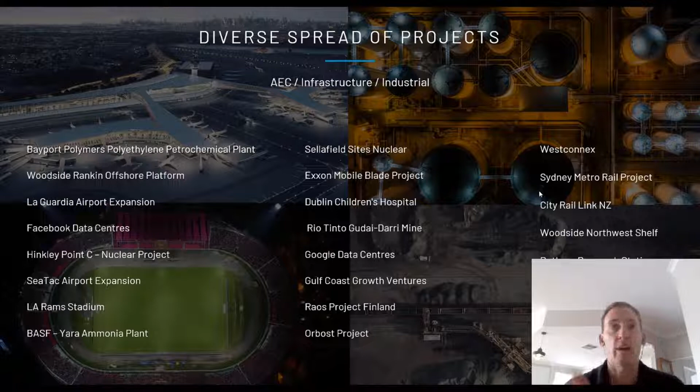And typically where there is a Navisworks model, where there is a 3D model involved in a project, whether that be from the design, the construction, or the asset management stage, iConstruct may typically be involved at some stage, purely because of the power of Navisworks, of course, but also iConstruct Pro.

So who is iConstruct, and really where do we sit when we talk about advanced work packaging and 3D models in general? iConstruct Pro is the original product from iConstruct, has been around for a number of years now, and really that's the foundational piece when we talk about model management within any project lifecycle.

So if there is a 3D model involved in a project and they're looking to standardize that model across all the different systems that they're ingesting and federating the models together from, then the foundational model conditioning tools from iConstruct Pro are really vital in setting up that model for success when we look at downstream processes like work packaging, AWP, work pack status reporting, constraint management reporting and all sorts of things. So iConstruct Pro is vital to that process.

The next being Control Panel, and Control Panel is really around visualization of constraint management, and then enabling the user through the use of Navisworks to create IWPs or any work pack for that matter — though we've spent a lot of time in the installation work pack space — based on the different data that we're ingesting and aggregating together from project controls, engineering, material, schedule, progress measurements, all sorts of things, to then make a more intuitive decision when it comes to creating IWPs, and then compiling the data associated to it.

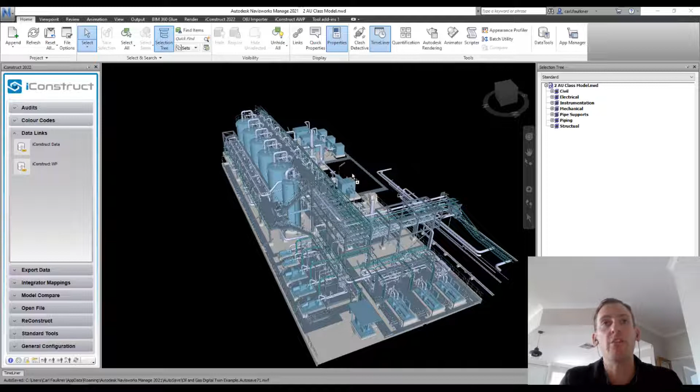So you can see here I've opened up a session of Navisworks Manage. What I might do quickly, I might just drop in the original model just to give you an understanding of where we can start from and then where we can end up. So this is an existing PDMS model, a typical federated site model, project model.

There are many different file types in here, RVM files, NWD files, DGN. There's some ReCap point cloud data in here as well. There's all sorts of stuff. And in reality, it's very hard to manage when you've got varying levels of structure and varying properties and all sorts of things, and file types as well, for example.

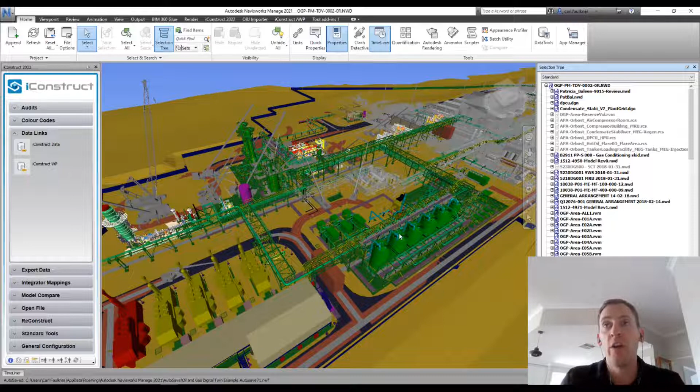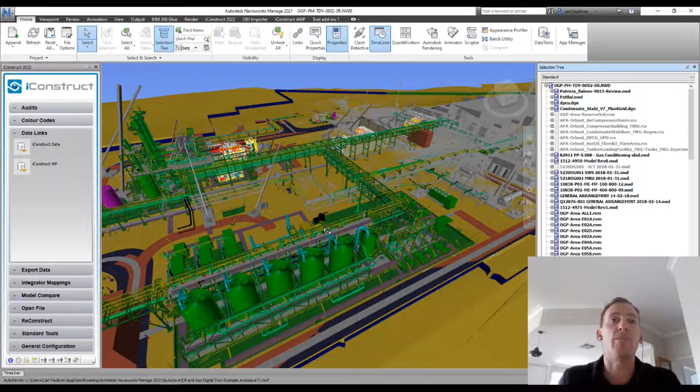So what we do in the first instance, typically when we look to manage models and geometry within the Navisworks space, especially using iConstruct, is to run the ReConstruct tool. And what that does is actually allow us to clean up that selection tree and standardize it. But not only that, it also allows us to then slice up areas and break large NWD files up, and change colors, and do all sorts of things. So it really allows us to condition that model for all that downstream processing.

So what I might do, I've already run the ReConstruct tool. So now I'll drop the new NWD file in, the reconstructed NWD file, and you can see now the selection tree is nice and clean and neat and tidy. It's not based on file type, there aren't separate RVM files in here. And you can see in this instance what we've done, we've grouped the model, or structured the model, based on discipline and then based on tag, for example.

So in this instance, you can see we can go to the CWA, that's the construction work area, the CWP, which is the discipline of course, and then the tags associated to that. And you can see the mechanical and the piping aspect as well.

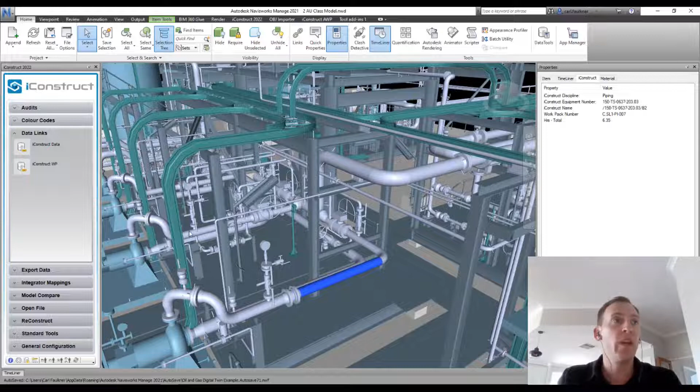From there, what we can do is look at how we can actually add data to that object. So you can see when I select this object here, we have some metadata associated to it, the work pack number, the equipment number as well. And we can use the data link tool to, of course, add that on, and that's what I've already done.

So once we have appended and data-linked on the metadata, say for example the tag, the work pack number, any other properties we'd like to embed on the object within the model - and we don't have to, by the way. We can build a lot of those relationships now within Power BI, and we can actually decouple the properties and the metadata from the object, and then do a lot of that relationship building and associating properties back to the object within Power BI if need be as well.

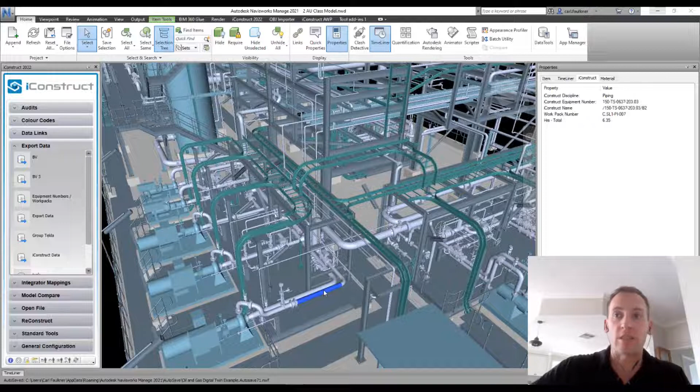So the next thing we need to do is export the tag, or the linking attribute, from the model and from the geometry out into a database or into a table. So we can use the export data tool to do that.

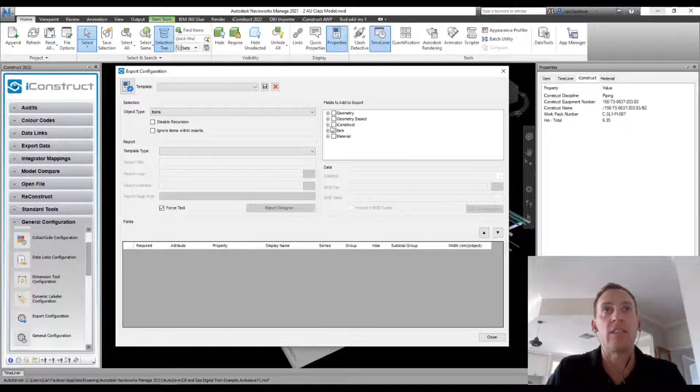So if I go to the general configuration under iConstruct Pro and go to export configuration, I can then refresh properties and build a new template or configuration. And in this instance, I'd like to export out the iConstruct name and the equipment number as well. I can export out any property - I might export out the work pack number also.

I'm going to export that into Excel. However, you can see we can export that straight into SQL, into Access, or into CSV. So there are many options when it comes to the file type in which we're looking to export out. And as I mentioned in this example, we'll export out the Excel spreadsheet.

I will actually look to group the data by iConstruct name in this instance. So I will select the group, and that will group all the objects that have the same iConstruct name, which is that component name there. It'll group all those objects together in the one line item within that table, so it'll reduce a lot of the duplicates as well. And then I'll hit save, and I'm going to call this iConstruct name to keep everything consistent.

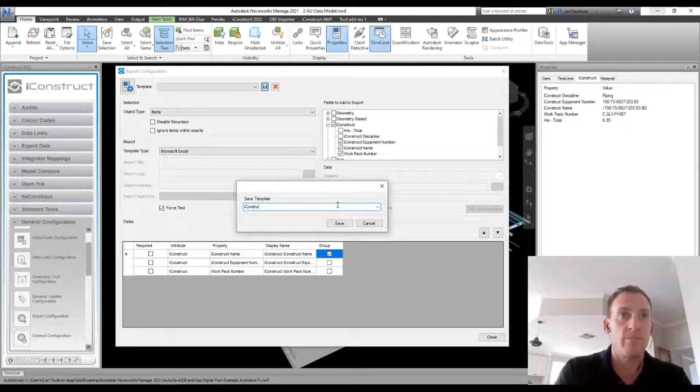Great, so once I've done that, I've saved that template. I can now close that, and I can now export that data out by selecting everything, of course. I can go to my export data, and I have my iConstruct name, and I can export that into an Excel spreadsheet or into a data table. And that really allows me to build the relationship or the link between the model and the data table or the report or the dashboard that we're looking to build within Power BI.

So once the data has exported out of Navisworks using iConstruct into Excel or a table, you can see what we've done here is we've exported out the iConstruct name, the equipment number, and the work pack number. Now, one thing that we do need to consider when bringing this data into Power BI is how we link this line or this object or this data table to the geometry. One thing we need to make sure we consider is naming and adding in the right structure of that property.

So one thing we've done in this instance, we've just adjusted that and added the colon in. That's the way iConstruct and Genus Connect identifies that column as being our linking attribute, and also the tab and then the property name. That's how it's structured when we look to build that connection within Power BI.

So let's save that now. You can see we've got the iConstruct name, the equipment number, and the work pack number, plus it's grouped the objects together. So we don't have duplicate objects, for example, and everything's unique, which is very important.

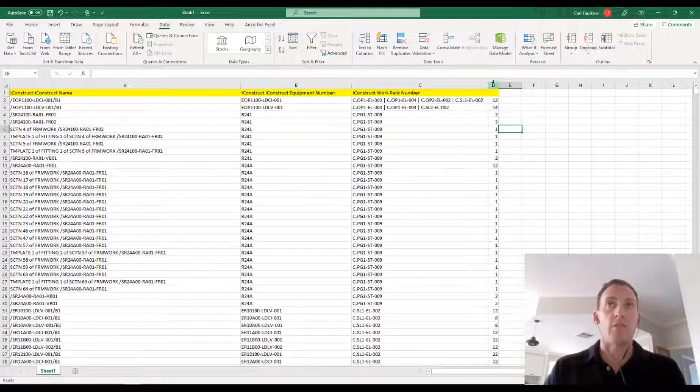However, there are many different ways and means of going about that. I'm just going to delete that out. So once we save that, I'll just save that in a moment.

So step one is exporting the data out of Navisworks. Step two is then actually uploading that model into Genus. So let's jump into Genus now. I'll just open up a new Chrome session and sign into Genus.

And so now what I'm doing is I'm launching Genus, and I'm going to go to my project. So this is Genus, the next product that I was talking about right at the start of the introduction. So the great thing about Genus, you can have multiple projects, multiple jobs in those projects as well, and then multiple models within that job. So there's a great way of managing the models.

You can have multiple levels. It's account-based as well, so I can add additional users, I can remove a user, I can only allow a user to be a viewer, for example, or an editor, or an admin. So there are many different ways you can invite multiple parties, whether that be a client, or an engineer, or a workplace planner, to actually view and access that data.

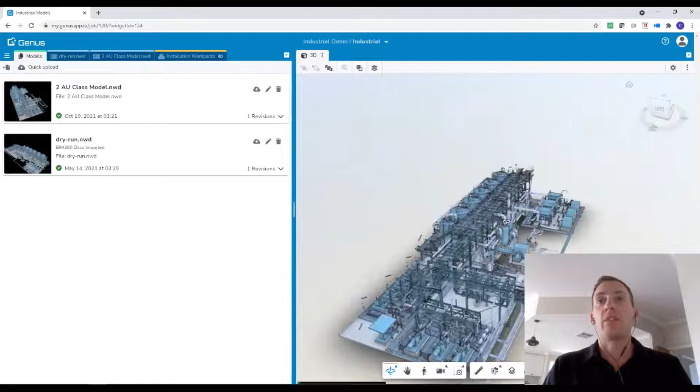So here I've got this industrial project, which is the project that we've been working on within Navisworks. And when I select the job, it then launches that job. And you can see now we've got the model, which is very important. So you can see here we've got the model, and look and feel, it's exactly the same as Navisworks. It's not different at all. So it's a great way of actually collaborating and pushing that model into the cloud.

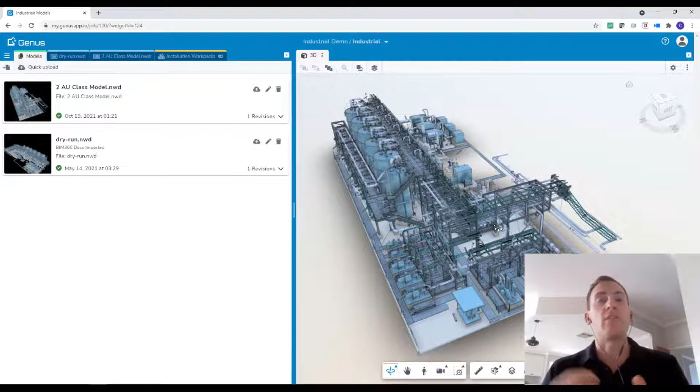And there's plenty of different use cases in which we could start to use Genus and understand how we can bring value through that. But today we're going to concentrate on the Power BI piece and pushing that back down to Power BI through the Genus Connect custom visual, and then obviously building out dashboards and tables from there.

So once we've pushed the model into Genus and it's processed and become available, the next thing we do is bring that back down into Power BI. So I open up Power BI. You can see I've actually built an existing dashboard or report. What we're going to do is build a new report, and then I'll come back to this one and talk through how a more complex dashboard is related, plus some other bits and pieces we consider.

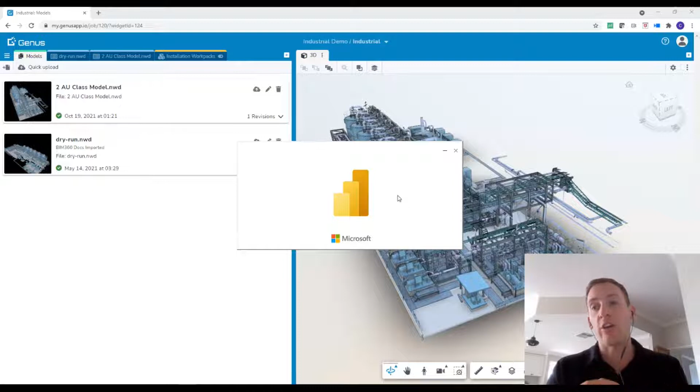I'm just going to minimize that and open up a new session of Power BI, and then we're going to start working through loading the custom visual, defining which model we want to view, creating an association and color coding, and going through some of the other features, functionality, and options we have when looking at Genus Connect within Power BI.

So I've loaded up a new session of Power BI now. The next thing I'm going to do is load in the Genus Connect custom visual. If I go to import, you can see here I've got a custom visual, Genus Connect for Power BI. I open, and now that loads in that custom visual file, which you can see here, and then I'm going to open that up. Now you'll see that it opens up a new, embedded session of Genus within Power BI.

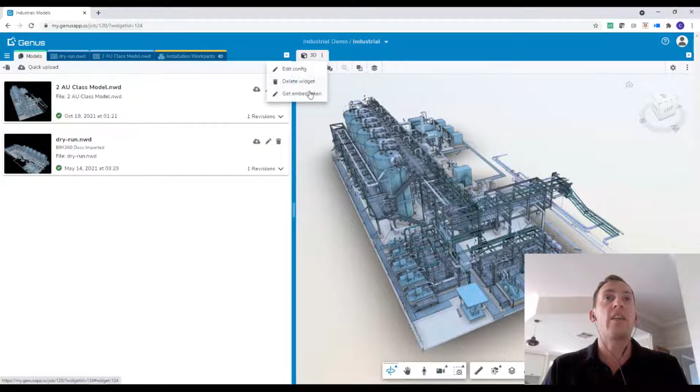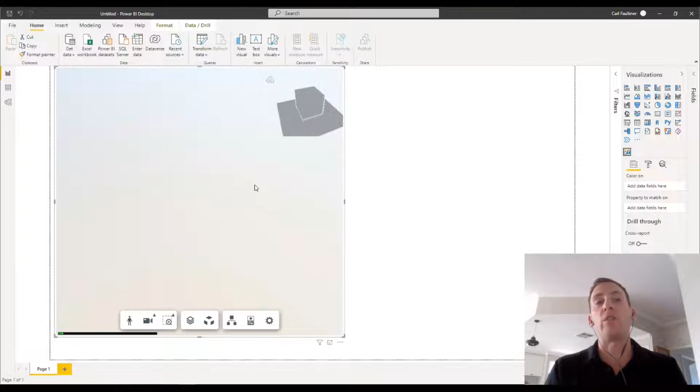It'll ask for a token. So what I need to do now is go back to Genus and grab that token. I'll get the token and copy that to clipboard, then jump back into Power BI and paste that in, and now that's saved. That acts as my credentials, using my login details based on that widget or code, and it also defines the model we're looking to display, or the widget we're looking to display within that custom visual.

So it's pretty quick. Now we've loaded the model, it'll just finish loading. You can see now we've got some of the features on the left-hand side from Genus, plus some of the Forge functionality you typically see within most Forge products. So, for example, properties, and there's a selection tree or a model browser.

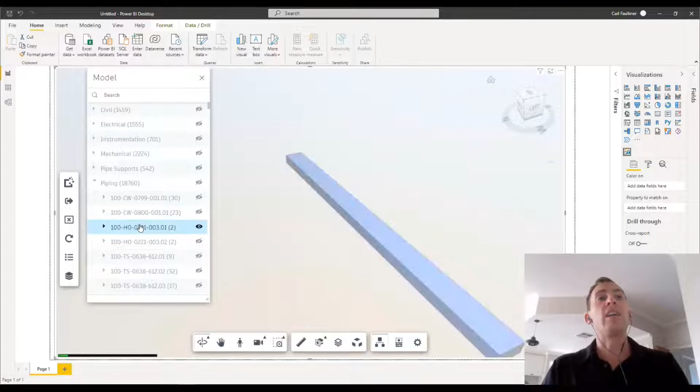Similar to Navisworks - if I just move this to full screen, and I know we'll build out a visualization in a second, but you can see now if I want to navigate to the piping, I can use the selection tree or model browser to navigate to different equipment tags or assets, whatever it might be, within that model browser. And this is all through Power BI.

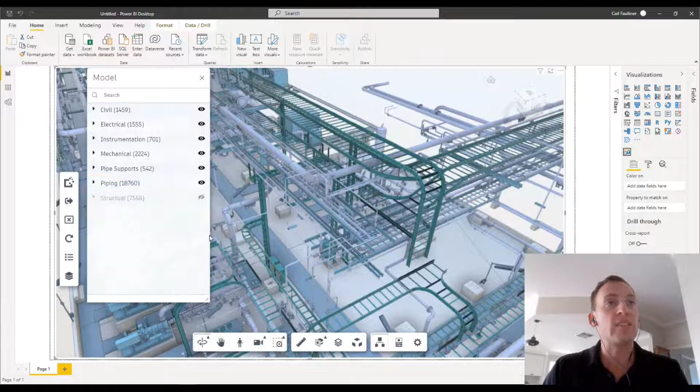So it's a very simple, easy to use interface, much easier than Navisworks, and still intuitive enough that people can go through and work out how to view, filter and do all sorts of things. Plus choose their own adventure when it comes to how they want to present some sort of outcome or objective, which is obviously the most important thing of BI.

So let's talk about how we connect data sets now to Power BI. The first thing we need to do is bring in the data table, and we're going to use the Excel workbook or get data option. It could be either, of course, but in this instance we use Excel workbook, and I'm going to load up the spreadsheet that I've created before.

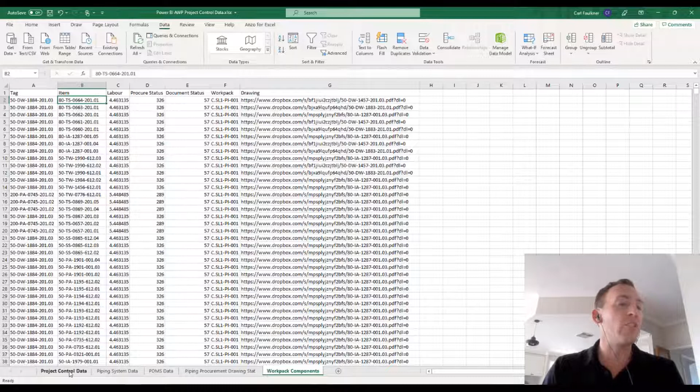So that's in here and in here - I've got one here, and I might just open this spreadsheet up a second. Now this is a little bit bigger than the one I built or exported out from Navisworks, and it just gives you an example of the varying data sets we can now introduce into that relationship, or build relationships between the different data sets, and then relate them back to the geometry within Genus Connect.

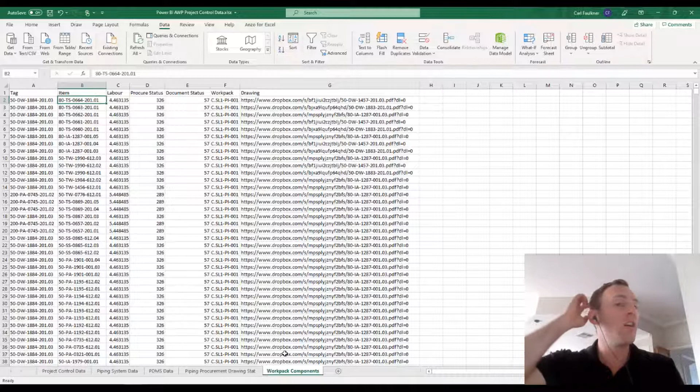For example, we have the project control data, which is vitally important, system data for commissioning, testing, all sorts of things, PDMS data - so the engineering and asset data that's created within the CAD system - and procurement data and work pack components, so more itemized material management data. So if we wanted to relate material management to procurement, to system data, to project control, right?

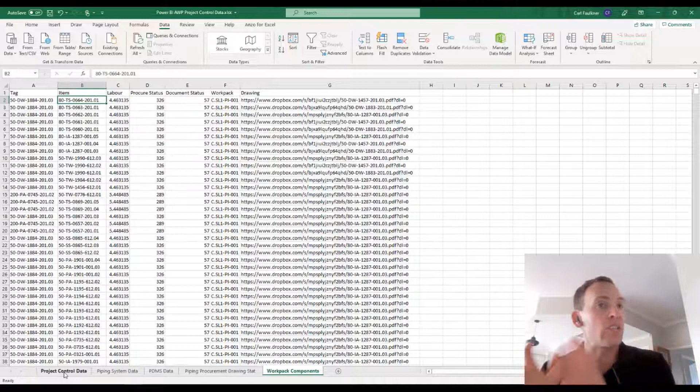So all these different disparate systems and data sets within that project delivery and AWP space, we now have the ability to connect them all together, utilizing the geometry as that central connector, which is vitally important. In the project control data, you can see we have the work pack number, the start date, the end date, and some variables, such as whether it requires scaffolding or a resource density calculation.

That's the great thing about introducing geometry into a lot of the decision making around space and location. Now we can calculate resource densities and scaffold requirements based on Z values of objects within the model. So if a Z value is greater than 3 or 5 meters, for example, it requires scaffold, tag counts, and all these are clashing as well.

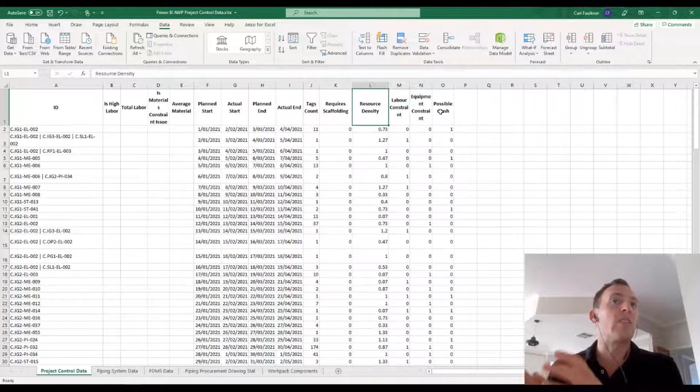If you're performing clashing activities within Navisworks and want to translate that across as a constraint, when we create our constraint management dashboards, that's another opportunity. So it's all about relating the geometry, and a lot of the decision making we do within the geometry, back with the data tables, project controls, and engineering data that we typically do within other database systems. It's a way of bringing that all together and connecting it.

So you can see I've got quite a lot of data here. Most important thing, as I mentioned before, is the iConstruct name. That's my linking attribute between these tables and, of course, the geometry. So let's go through how that works now.

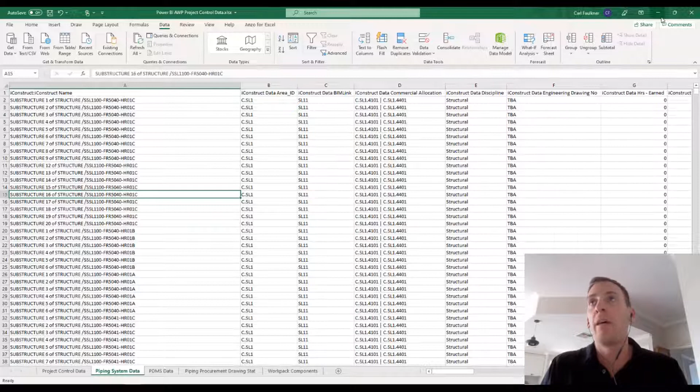As we all know within Power BI, it's not just Excel, but we can connect to SQL databases, Access. So I'm just going to bring in all these different tables now, and we'll start to build out different visualizations. I'll just quickly review them to make sure the headers are correct - that's also an important thing to consider. They all look pretty good to me, so I'm going to press load now, and that'll load all that data in.

Going back to what I was saying before, the great thing about BI is the fact that not only do we have to connect to Excel spreadsheets or CSV files, but we can also connect to an SQL database. There are other options as well, which are a bit more intuitive - SQL databases, web OData endpoints, for example. And if you go to more, there are other options in here as well, which I think are of real value.

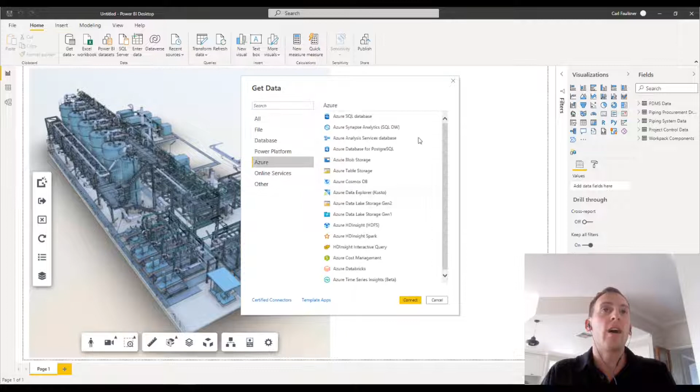So when we start to look at some of the other services that are available - Amazon, for example, PostgreSQL, SAP HANA, SAP, Oracle - there are just so many examples of how we can connect to different data, Azure as well, for example, if that's where we're running the data.

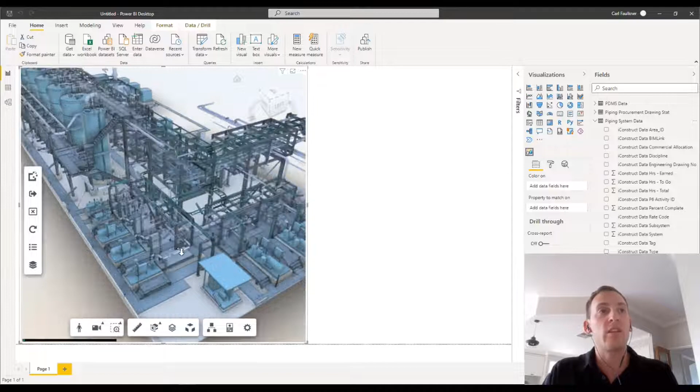Okay, so once we've done that, the next thing we want to do is quickly connect the data sets to the geometries. So from there, we want to go to our piping system data. In here, we have our linking attribute - in this instance, the iConstruct name. If I just quickly zoom onto an object and select the property browser, you'll see here, and I'll expand that, our iConstruct name - that's my linking attribute. So I'm going to drop that into the property to match the field in the visualization configuration.

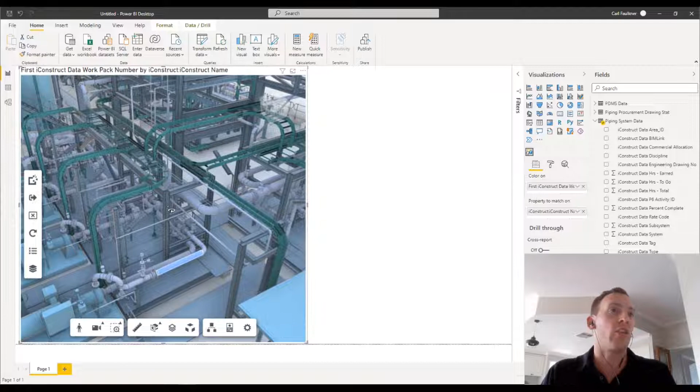And then I'm also going to use the work pack number as my color coding property as well. So now you can see I've color coded the geometry based on that work pack number. It's a quick, easy way of color coding the geometry from an external data set. And as I hover over, there's a tooltip, a typical Power BI tooltip, showing what the iConstruct name is and also the work pack number associated to it. So that's quick, easy, and simple to use.

And then we can start to bring in all sorts of different visualizations and get creative with how we build out dashboards and visualizations. So let's jump back into the original Power BI AWP constraint management dashboard and status report that I built previously, and start to talk through some of the use cases and ways we can relate this back to the AWP space and how it can provide value.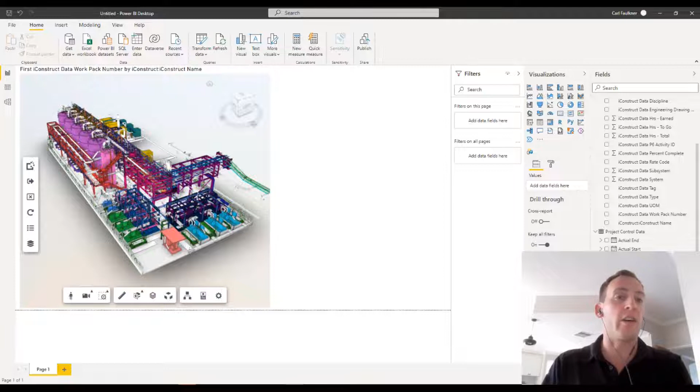So I'm just going to jump back into my previous dashboard here, and you can see some of the examples in which we've brought in. I've just color coded the piping, the piping work packs in this instance, but of course it could be any discipline. It doesn't need to be piping. It could be mechanical, structural, electrical if you've got equipment modeled, and concrete as well.

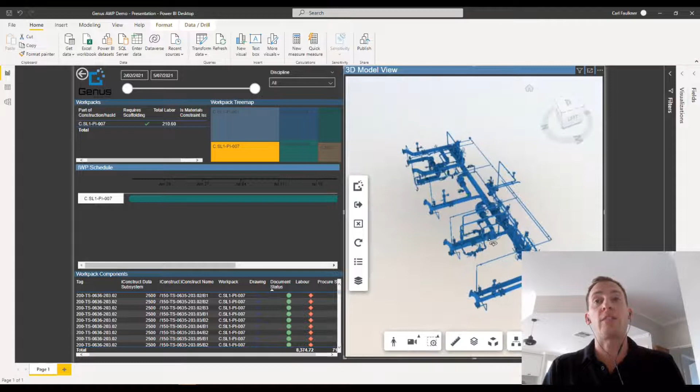One of the great things is just identifying what is within a work pack. So if I want to see what objects are within a work pack, for example piping work pack 07, I can select that, and that'll zoom to and show me the objects contained within that work pack. I can also go to my settings within Forge and ghost hidden objects, and you can see now it'll just ghost out the objects that aren't selected, and then I can go back and select that, and that will remove and hide all the objects that haven't been selected.

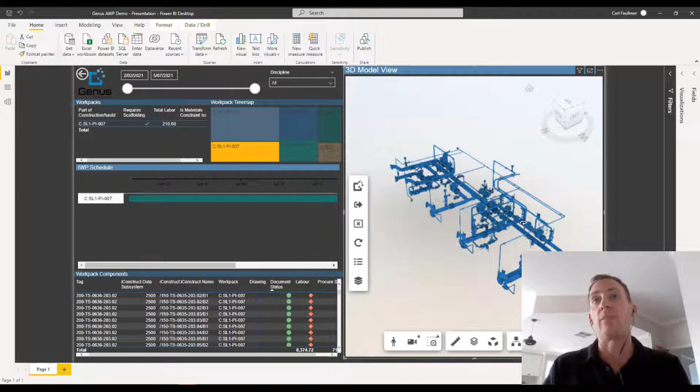So there's an optionality there when it comes to visualization in the model as well. It doesn't just need to be on and off. Another great aspect is the legend, which I think is very handy.

So if, for example, we have all the work packs shown and you just want to see within the model space which objects are contained to what work pack, that's another great way of visualizing that.

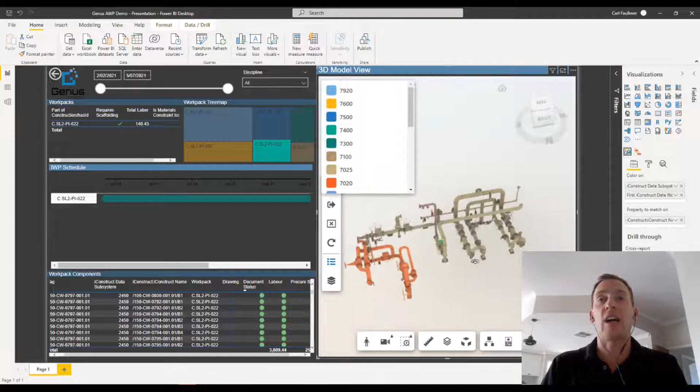Let's say I want to now go to this work pack here, but then I also want to understand what the systems are, so the separate systems from a turnover perspective or from a commissioning or testing perspective. What I can do is actually change the property in which we're color coding by. I'll move that up, and you can see now it's actually changed the colors, and the legend has changed as well based on the system.

And now if I change that back, you can see now it's changed the legend and the color code on the model back to just the work pack.

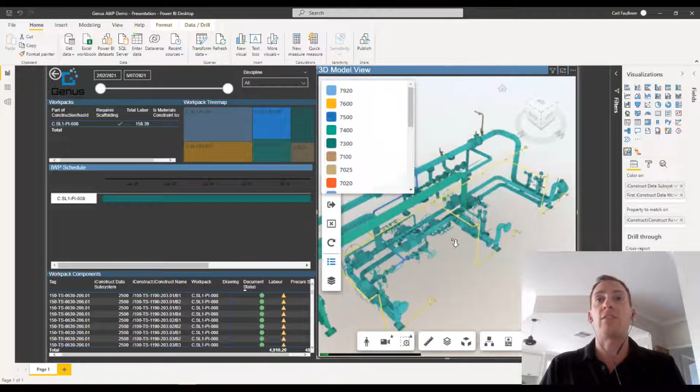So maybe this work pack might be easy to see. Once again, I just want to see what systems there are within that. You can see there's the yellow system, for example, the blue and the greens. So you can see the different systems within the work pack.

Through changing the property in the field and actually being able to do that on the fly within Power BI as well, which is great and very handy.

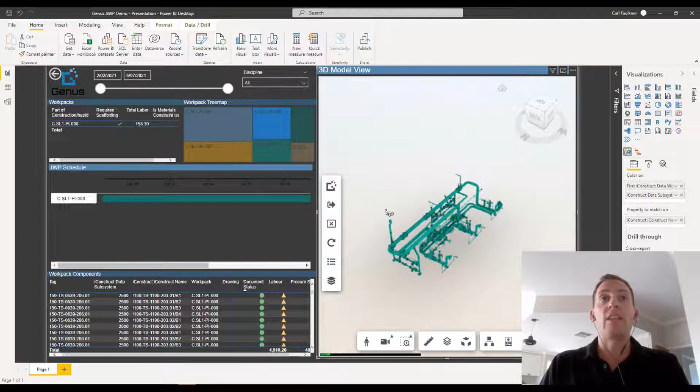Great. So once we've done that, the next thing we can do is start to work through some of the other aspects of the custom visual and Genus Connect. One being the slicer. So we have the ability to integrate the geometry isolation or selection with some of the slicers as well.

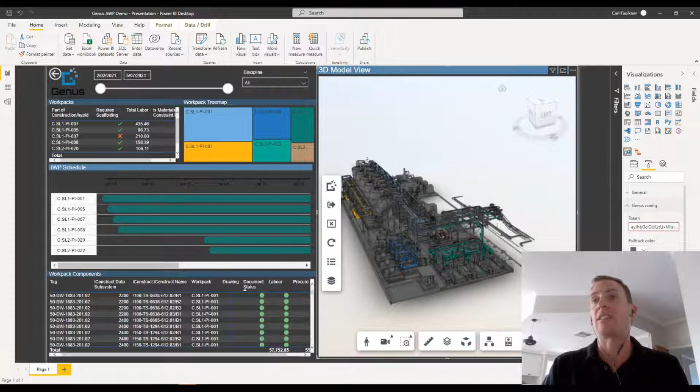Let's say we just want to see what work packs are being built within a certain date period or time period. If we go to our Genus Connect configuration or format, and then go to Genus configuration, we have here the isolate sliced data. If I turn that on, you can see now it's actually just showing or displaying the work packs that are contained, or the objects that are contained within that date range.

So if I now come along and adjust the date range, you can see now it actually adjusts the work packs that I can see within the visual. So I've run out of days there, so I need to move the other one, for example. And you can see now, I'm sure that'll go down to 1 in a second.

So you can see now I've added another one. It's a great way of, and you can use obviously slicers in many different ways within Power BI. One being dates, of course, and there are other ways and means of using it. So that's one great example.

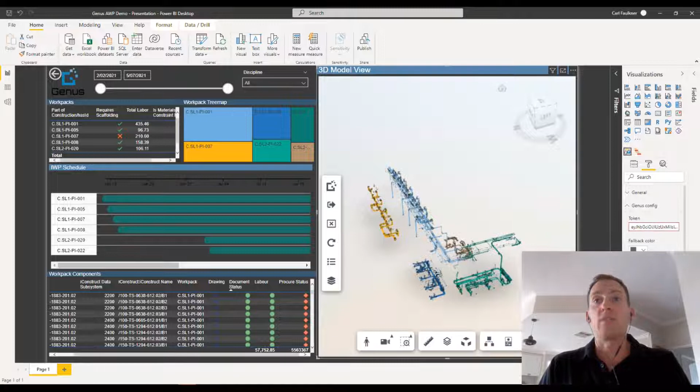And then, of course, as I mentioned right at the start, the ability to turn on the tooltip. So I can see now if I hover over an object, you can see I've got the name, the work pack, and the system, all available through a tooltip and hovering over an object. So if I zoom in and I want to see what system that object is contained within, I can do that through just hovering over that as well.

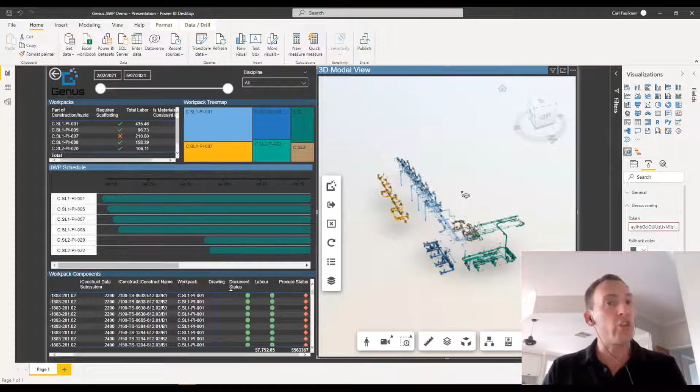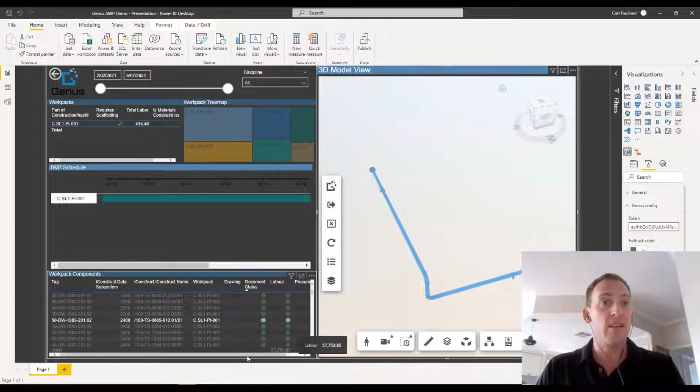Another aspect is, once we've created our IWP packs, we may have drawings, documents, site work, and specifications that we want to access and associate to objects. We can build links, URL links, and icons within Power BI. So, for example, I want to go to this object here, this ISO, and understand the system: the document status, labour status, procurement status, plus man hours, and whether it requires scaffolding. This is where we can aggregate and consolidate all the different constraints associated to executing that work pack in the path to construction, within one space.

The great thing is, you no longer need all the different data sets within one area or one table. You can now have them in separate systems and separate tables, and build the relationships within BI, relating it back to the geometry when you need to.

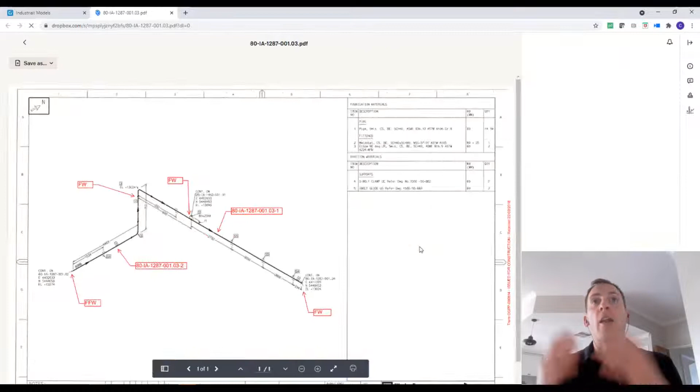So let's say I want to look at the drawing associated to that object, or that line, or that isometric. I can select that object option there, and it'll bring up the isometric. That's just another BI function available. There are subsequent features and options we can include now, because we're integrating with Power BI, and not necessarily limited to doing it within Navisworks. That's another great example.

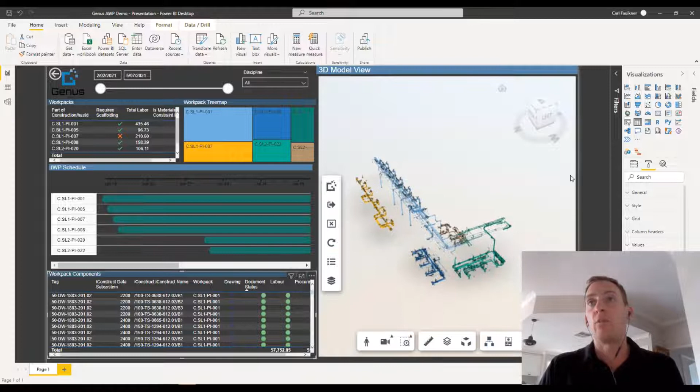And if you want to turn the tooltip off, we can go back and turn that off, and also turn the slicer off. So there's plenty of different options, and many different ways and means we could build out different dashboards.

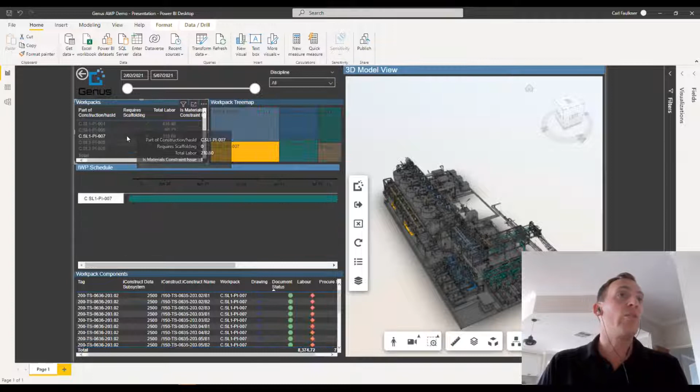Constraint management is one, so understanding which work packs require scaffolding and which don't, based on a Z value, for example. We can get labour constraints, material constraints, and it's just an easier way to actually digest and consume that data, especially for non-technical people, people who aren't necessarily CAD or VDC people. They can relate to this. It's a much more intuitive interface than in a CAD system, so there are many different advantages there.

Another great aspect is that some of the Genus tools have also been brought down to Genus Connect. So, for example, I want to now select similar and select the isometric - I could do that as well.

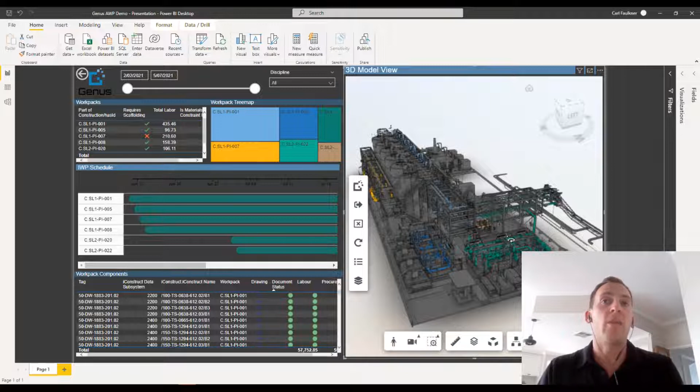There are many different features and functionality within the Power BI component. Not only is there constraint management, there are also different use cases around clash management, turnover and system - you saw before I built a system, and you can relate a system color coding and legend back to a work pack. Statusing, of course, is very popular, so we want to see material movement and the status of construction and installation, even hazards, or plant equipment. There are many different use cases for relating different disparate data sets.

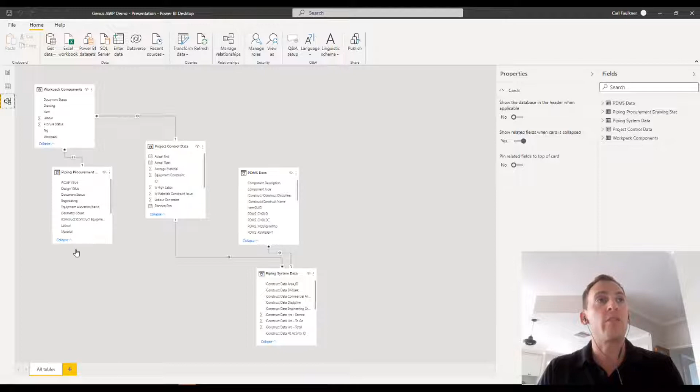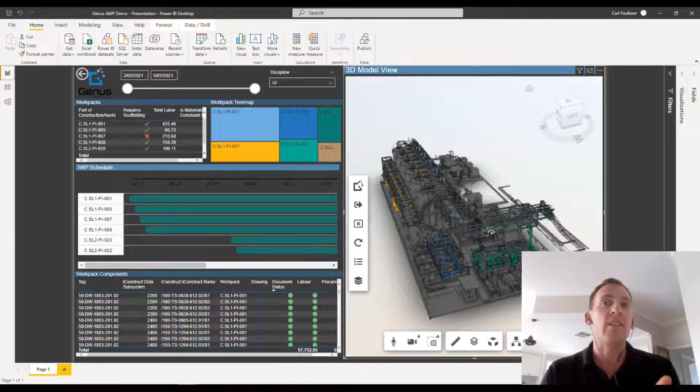And the great thing about BI is that we can build out all the different relationships to each other, and then perform different calculations and queries and activities within BI. So that's where we're at from a Genus Connect perspective. When relating it to AWP, one of the best things is the status reporting, the constraint management reporting, and the path to construction visualization - but not only visualizing, but making it more intuitive and self-configurable when relating both the data and all the different data sets within a project back to the geometry.

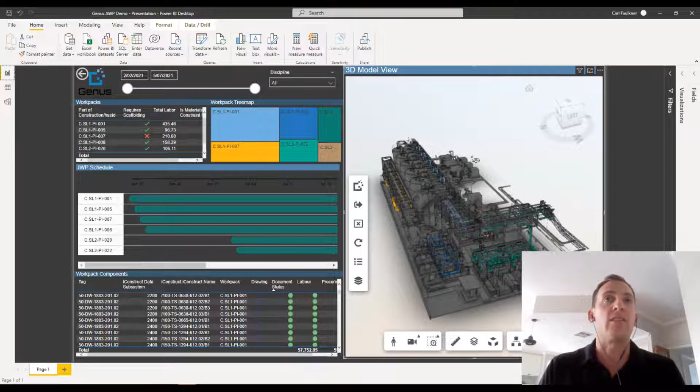The great thing about this is nearly everybody in the business now knows how to use Power BI, so typically people will want to interpret that data in different ways. That's really the great thing - once we understand how to connect the model and geometric objects to the tables, you can allow any user to build out whatever dashboards they need based on the objective they're trying to achieve at that time, rather than needing to pre-build all these different dashboards that take days and weeks to build.

If you provide the end user the conditioned, cleaned up model that's hosted in Genus, and give them an understanding of how to connect their data sets to the model, then we can allow all different users of different types and skill sets, and different roles within the business and project, to develop their own dashboards while still getting the power of geometry and data.

That's really where we see the future of digital engineering going in this current state: cleaned up cloud-based collaborative models relating back to a BI interface for powerful insights. For example, in the AWP space, things like constraint management, handover management, system turnover management, testing, commissioning, and even work pack management when it comes to contents. We're even seeing a real appetite for this in the asset management space as well.

Once we hand this over to operations and asset management, they will look to interpret use cases in their own right. Those use cases might be work orders, inspections, or maintenance activities - so when do we need to maintain something and how often. Or even from a time series data perspective, we have IoT or production data associated with different systems, and we now want to visualize that production data or time series data for the systems within the project or asset.

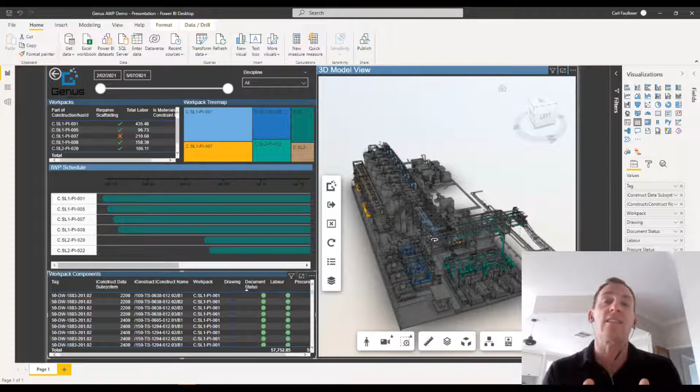That's the beauty of this - you can configure it for one specific purpose like AWP, constraint management, status reporting, material management, whatever it might be. But then the good thing is we have a digital asset that we can hand over to operations from a maintenance perspective, and then they can reinterpret that for their own purposes and objectives.

So today we've gone through the process of taking a Navisworks model, a native PDMS model, reducing it, restructuring and conditioning that Navisworks model, and slicing it up into a smaller CWA, construction work area, for example, restructuring it by CWP and then asset ID or tag, pushing it into Genus to convert or translate that NWD file to a Forge model, which is in more of a collaborative environment, and then passing that back down to Power BI.

So then we can build out more intuitive dashboards, whether that be work pack management, project control, or statusing. There are so many other options in which we can start to introduce Power BI, and that really complements and finishes off that whole workflow when we talk about AWP and dashboard reporting. That's really the flow and the process - very straightforward, very easy, fully configurable, and there's a lot of value in going through it.

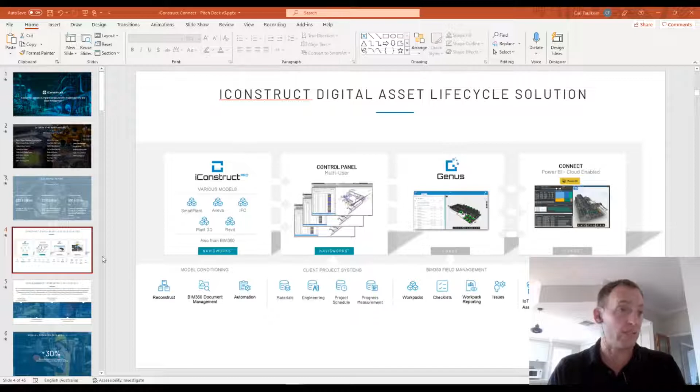So let's take a quick look at Genus. Genus is iConstruct's new cloud-based solution in which we have the ability to uplift a model from Navisworks, for example, and push that into the cloud, then actually convert it to a Forge model. This is obviously the first step prior to pushing it down into Power BI. But first, let's have a look at Genus and understand a few of the different opportunities and ways we can add value and get value from Genus, the iConstruct product.

As you can see here, we have two aspects of Genus: the table on the left-hand side and the model on the right-hand side. The beauty of this is the table is fully configurable, so we can create any data sets, tables, and lists within the table on the left-hand side, and we can build a relationship between the table on the left and the model on the right.

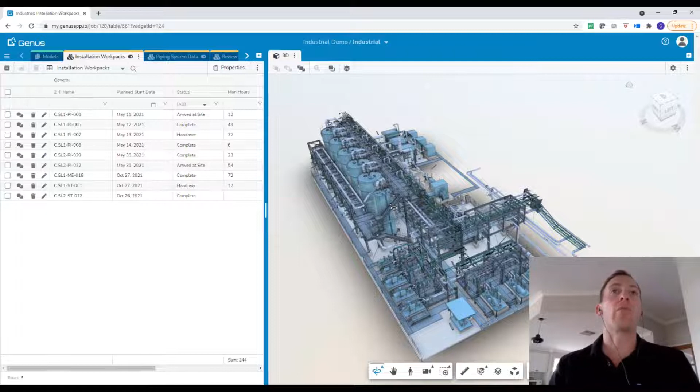In this example, you can see I've listed the work pack numbers, the same ones we saw within the Power BI report, but now I've pushed them into Genus, into the table on the left-hand side. When I select a different work pack in the table, you can see it relates to the geometry in the model view on the right-hand side. That's very easy to set up and configure.

The visibility or navigation is configurable as well. Not only can you select a line item in the table on the left and view just the components of that work pack, but you can also remove the isolate, for example, and change to highlight instead. So there are many different options, and you can see now that the objects contained within that work pack have been highlighted.

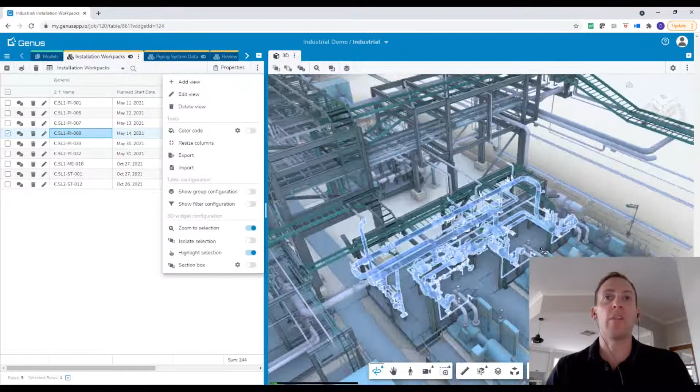I'll change it back to remove that and isolate. You can see now when I select the different work packs, they relate to the other side. Now, if I wanted to create a new work pack, for example, I can select an object.

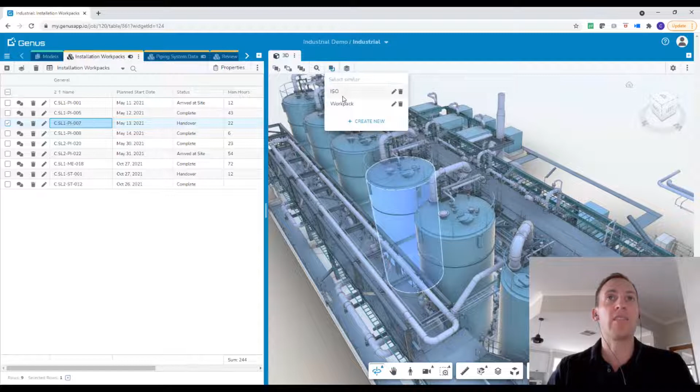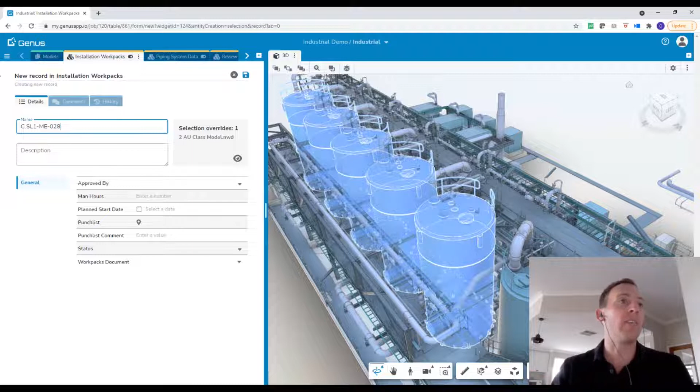I select an object that I think is in the work pack and go to select similar, and say work pack. That will select the objects that are in the same work pack. I can then right-click on those objects and create record from selection. By doing that, it creates a new work pack record or component in the table here, and you can see it takes the work pack number on the object, giving me the different inputs or column headers I can add data to.

For example, approved by, I won't add anything there, but man hours, for example, if I had man hours, I wanted to add a date, punch list item, punch list comments, status, for example. If I wanted to add a work pack document, I could do that there as well.

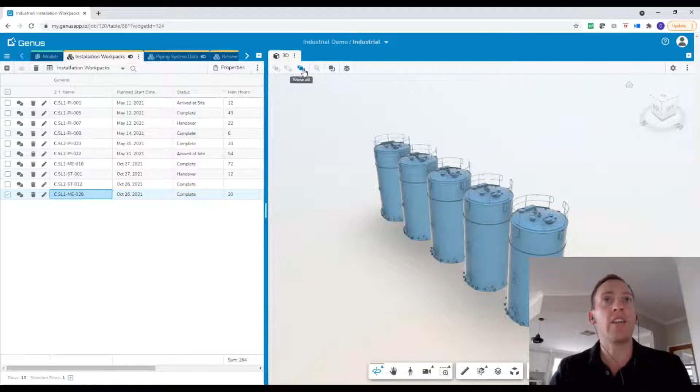So I've pressed save, and that creates that additional record within the table on the left-hand side. You can see now I've created that additional work pack, simply from selecting an object in the model, selecting the similar objects contained within that work pack, and then creating that record into the table. Now I can show all again and bring all the components back within that project or CWA.

The next aspect is the ability to color code, based on status, work pack, or any property, any column within my table. You can see I've added all these different columns, whether that be a work pack name, planned start date, status, man hours, punch list items. If I wanted to attach drawings, or workflow that to a specific approver, I could do that as well.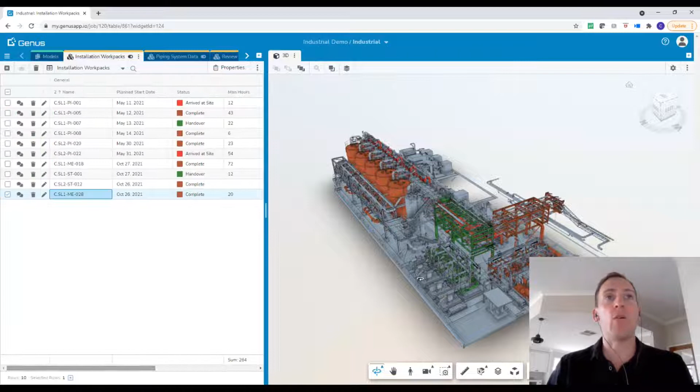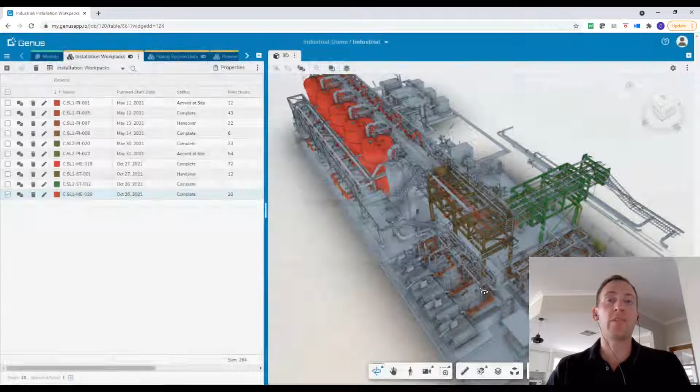You can see now, by selecting the color code tool, it's color coded the model based on the status. But I can change that color code, adjust it to, for example, the work pack name — and this is fully configurable. So I can change that to the work pack name, and now it re-colors and overrides the colors in the model based on the work pack name as well. Then I can change that back to status instead. So it's very simple to use and quick, much simpler than many other products.

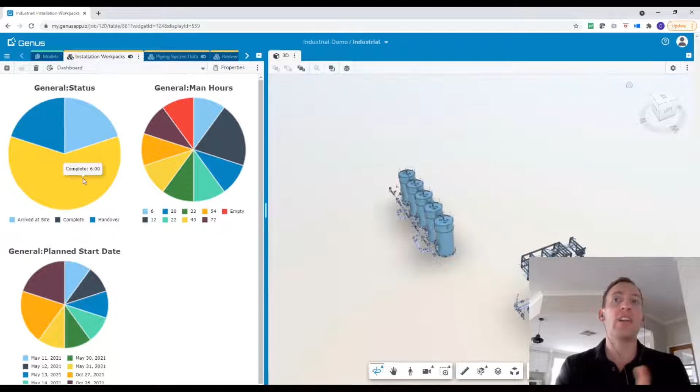Another aspect is we can go to the different components of this table, one being the charts — similar to what we did in Power BI. In this instance we've created pie charts based on any of the properties within the table, for example handover. When I select the different sections within the pie charts, that relates to the work packs or the objects within the model space.

It's fully configurable — you can do status, man hours, planned start date, for example. And then if I wanted to bring everything back, I could just select all, and that brings everything back. The last aspect, of course, is the timeliner.

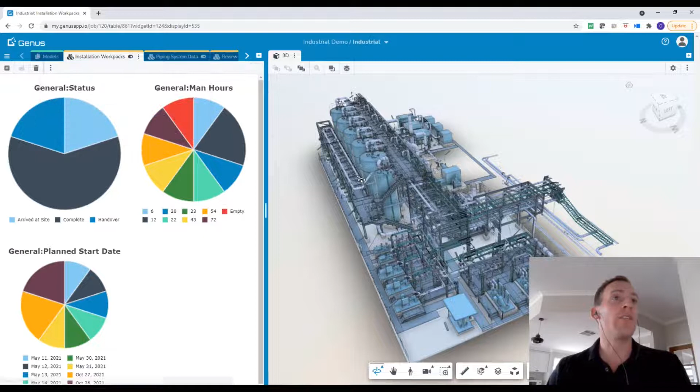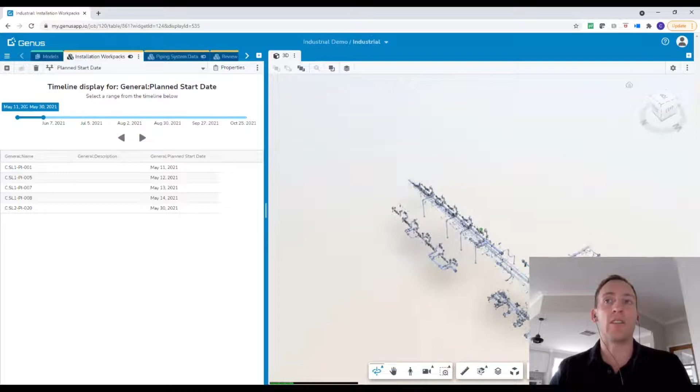So similar to what we do in Navisworks, in Simulate, using the timeliner, we can do the same thing within Genus, and work through a timeliner based on installation date of the work pack, for example. As I move through the different dates, it corresponds to the objects contained within that model, and displays those objects based on that date. This slider is adjustable as well, so I can change the slider, and that will relate to the objects or work packs tied to those dates.

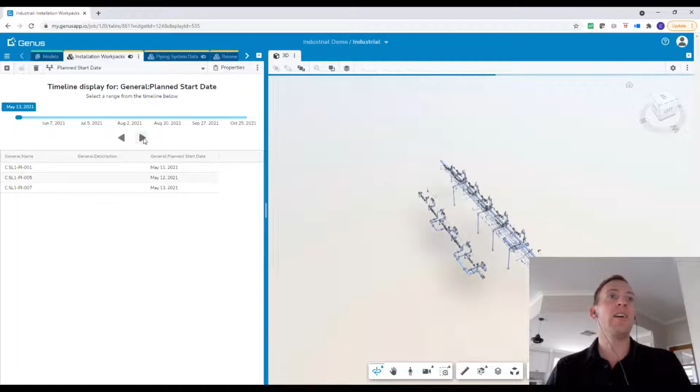So it's a great way of simulating the construction sequence and visualizing that within the model space. It's very simple to use, and all we do is select a date column from the table.

So let's go back to the table now, and the last thing I'll talk about is the ability to create a new table. In this example, I have one table for the work packs, and another table I've created with a list of all the project control data. I've imported an Excel spreadsheet of the project control data, which is very easy to do.

All we need to do is go to the import option, drag and drop the Excel spreadsheet into there, and that will populate this table. You can see all the project control data associated to this project here. The great thing about this is we may want to start to review the model in different hierarchies and structures within the table.

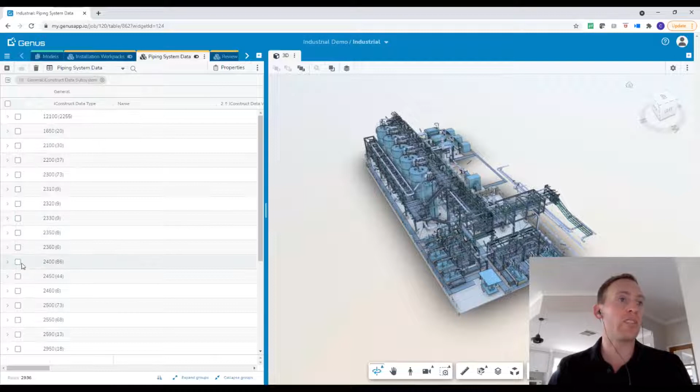For example, I may want to review the model and geometry based on subsystem. I can take the subsystem column header and move that up into the filtering panel, and if I collapse groups, it's grouped my data set by that property. As the table is directly related to the geometry, if I select any of the systems grouped here, it relates to the geometry, and selecting it isolates the objects contained within that system.

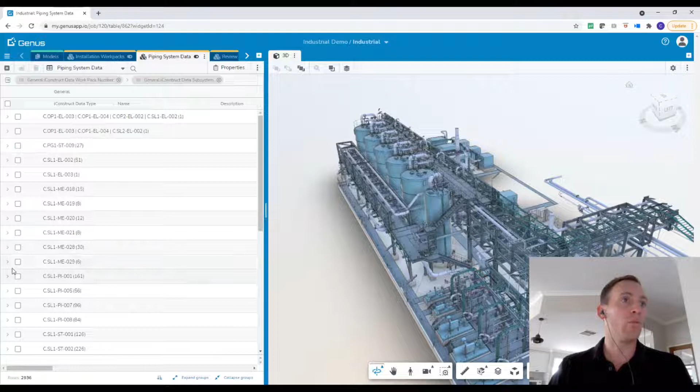I may now want to take another property and group as well, to build out that hierarchy. For example, I can take the work pack and move that up into the filtering panel at the top, then collapse groups, and now I can go work pack and then system. If I select this, you can see that is a work pack, and I can expand the system to see that subsystem contained within that work pack.

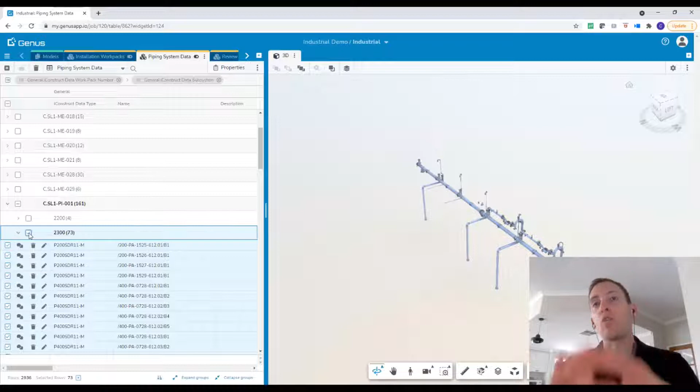When we talk about hydro testing, commissioning, and the different aspects of the work packaging and construction process, we want to interpret and view the geometry in different ways based on what we're doing at that time. We don't necessarily want to reconstruct the selection tree each time we review the model, but can just use the data set relating to the geometry and filter and regroup the data in the table. This makes it quick, easy, and much simpler to re-query the geometry based on the table on the left-hand side.

Not only can you do that, we can also color code on all the different tables. For example, I may want to color code based on subsystem, so I hit save, turn that on, and that will color code the model. This is quite a large model, but that'll color code it based on the different systems. Then I can pick up that system and drag and drop it to the top again and collapse. Now I may select that system, and that's color coded, for example. So it's easy, quick, and very simple to use.

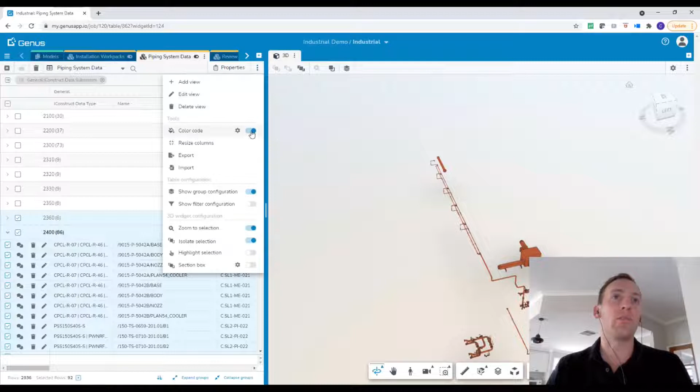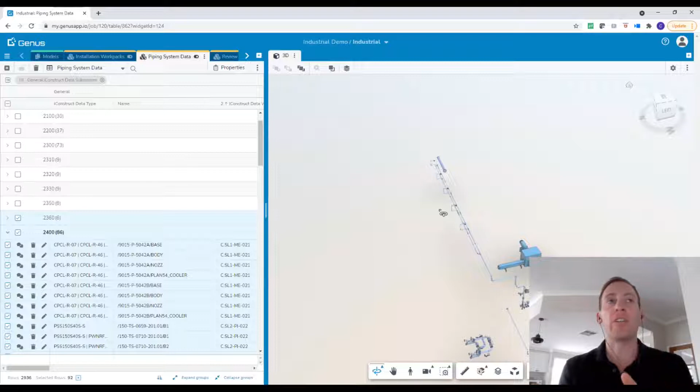And that is Genus. So Genus, to summarize, is iConstruct's new cloud-based solution. It's a combination of Forge and the model space, with the ability to build out self-configurable tables that are completely customizable. You can filter those tables, add geometry and objects to different groups within them, color code and report, and also create simple timeliners associated to the different groups you have created within Genus.